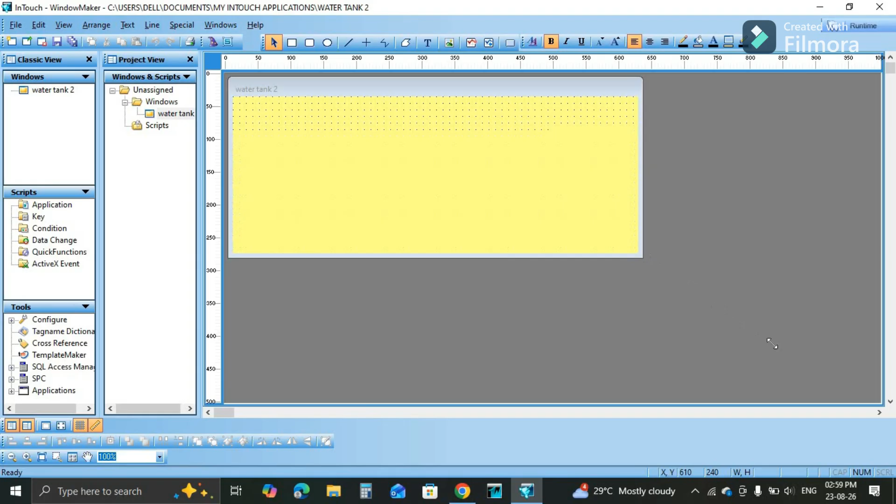First, we will create the HMI screen and arrange all the required objects. Second, we will create and configure the tags. Third, we will configure the water level animation. Fourth, we will add the required scripts and control logic. And finally, we will run the project in runtime mode and test the complete operation. So let's start building our water tank filling HMI project step by step.

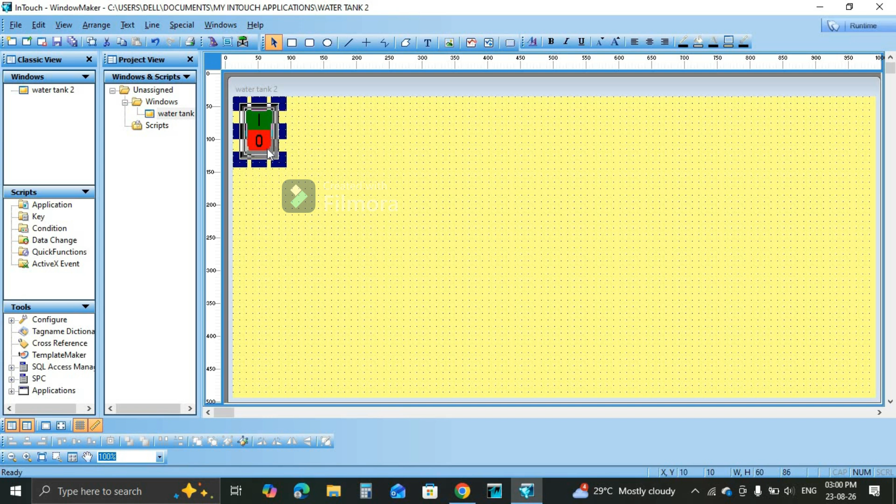First, open AVEVA InTouch window maker. Create a new application and give it a suitable name. After creating the application, open the window maker environment. Now we need to create a new window for our project. Let's create a window and name it Water Tank. This window will be our main HMI screen.

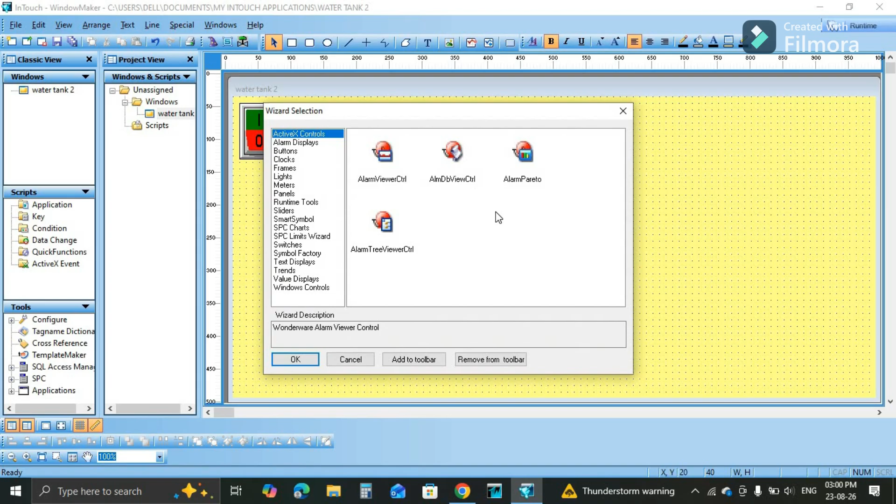Now we can start designing the screen. The first object we need is the water tank. Place the tank in the main working area. We can resize the tank according to our requirement and position it properly on the screen.

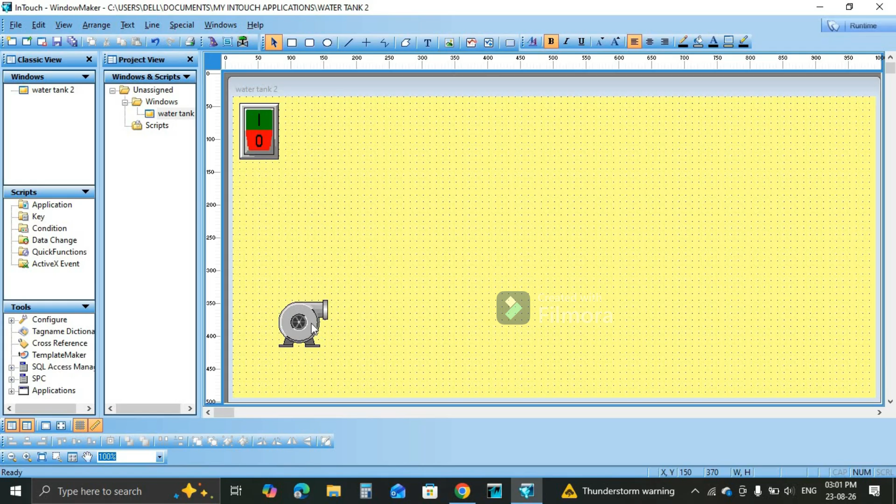Next, we need a pump. Place the pump on the left side of the tank. The pump will represent the device that supplies water to the tank. Now draw a pipe between the pump and the tank.

We also need a valve in the water flow path. Place the valve between the pump and the tank. The valve will be used to control the water flow.

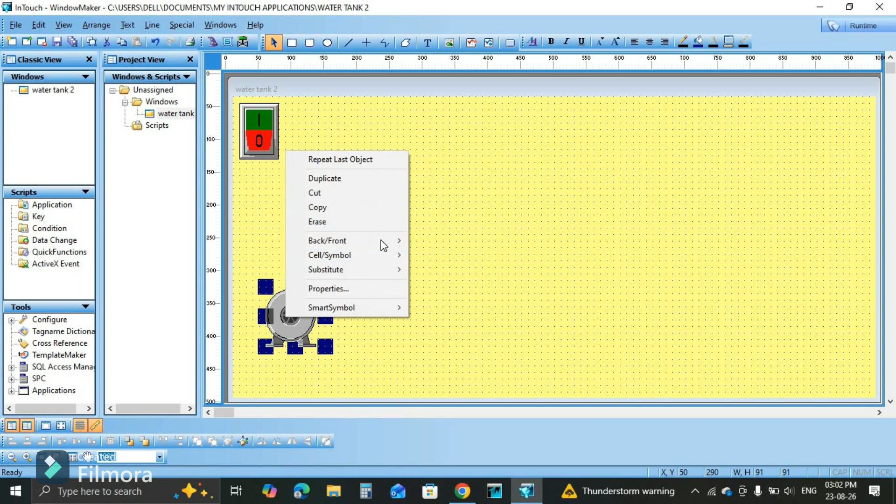Now we need an on and off control switch. Place the switch on the screen where it is easy for the operator to access. We can also add text labels for the pump, valve, tank, and control switch. This makes the HMI easier to understand.

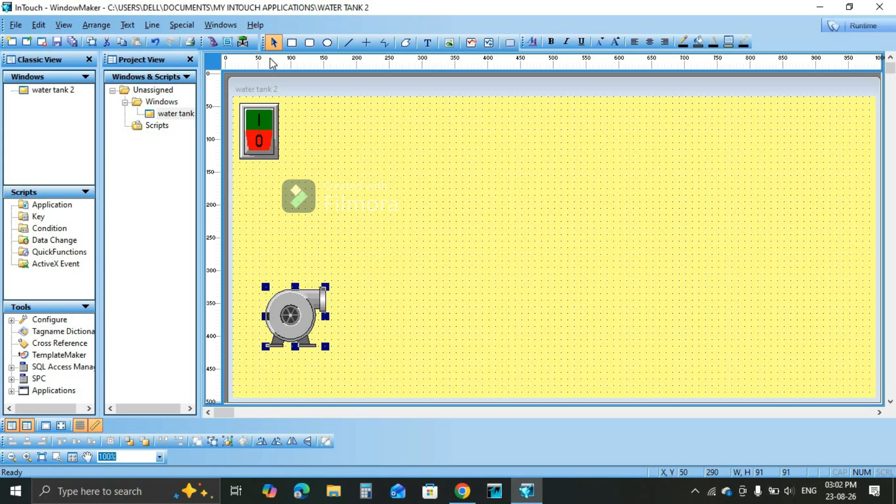Now we need to create the water inside the tank. For this, create a rectangle or suitable shape inside the tank. Place the water object at the bottom of the tank. Make sure the water object fits properly inside the tank. This object will later be animated to show the actual water level. So, at this stage, our basic HMI layout is ready. We have the tank, pump, pipe, valve, control switch, and water object.

Now let's move to the next step and configure the tags.

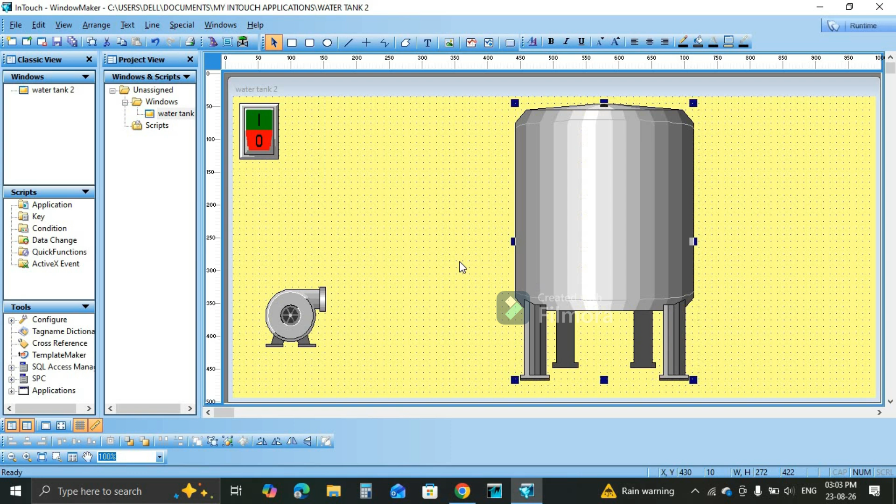Now we need to create the tags that will control our HMI objects. In InTouch, tags are used to store values and control different objects and animations. Open the tag name dictionary.

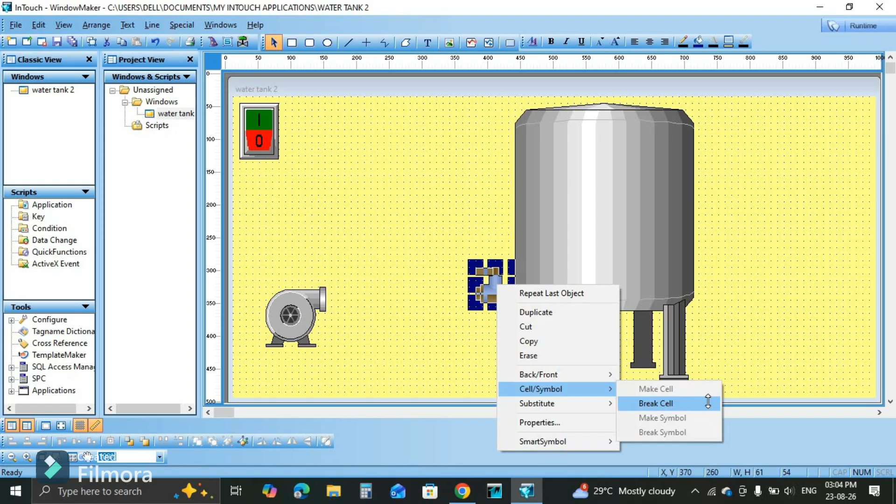Let's start with the main on and off control. Create a new tag named S1. Set its type to memory discrete. This tag will be used for our on and off switch. When the switch is off, S1 will have a value of 0. When the switch is on, S1 will have a value of 1.

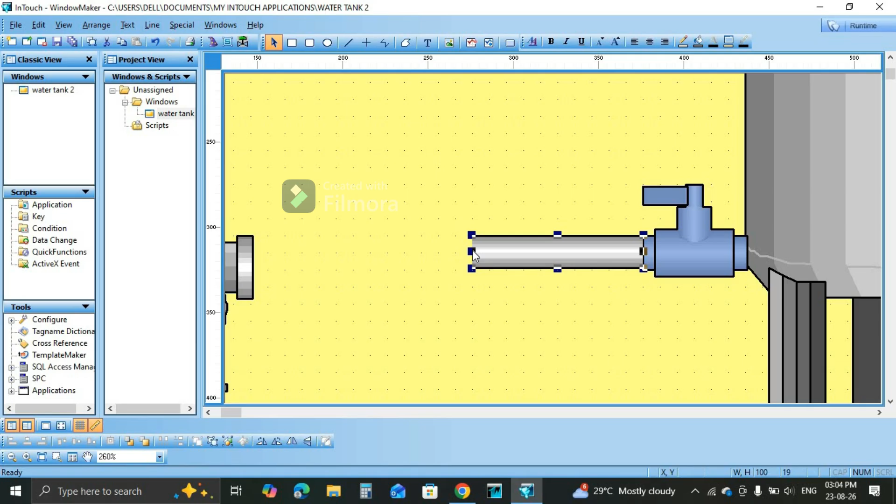Now let's create the tags required for the pump and valve. Create the required pump control tag and set it as a memory discrete tag. This tag will control the pump indication. Next, create a memory discrete tag for the valve. We can use this tag to indicate whether the valve is on or off.

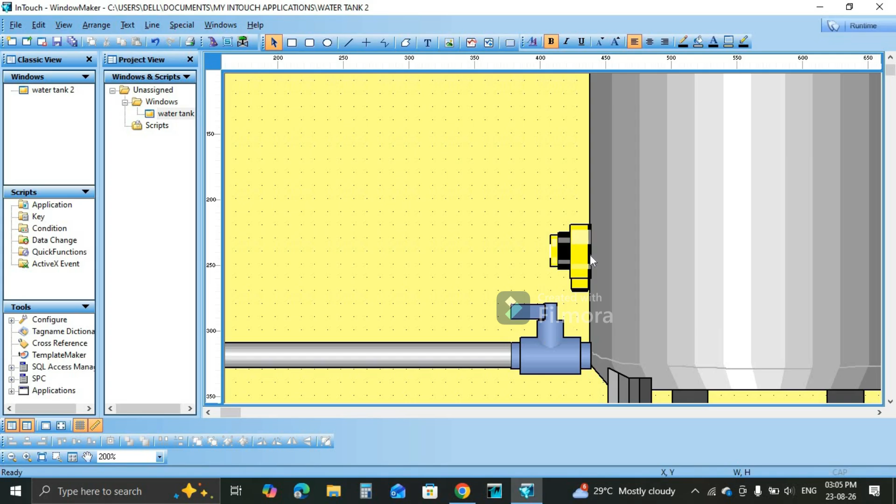Now we need the most important tag for this project. Create a tag named fill. For the water level, use a memory real tag. The fill tag will store the water level value. We will use a range from 0 to 100. So, when fill is 0, the tank will be empty. When fill is 50, the tank will be half full. And when fill reaches 100, the tank will be completely full.

We can also create tags for the low level and high level sensors. These tags can later be used for automatic control.

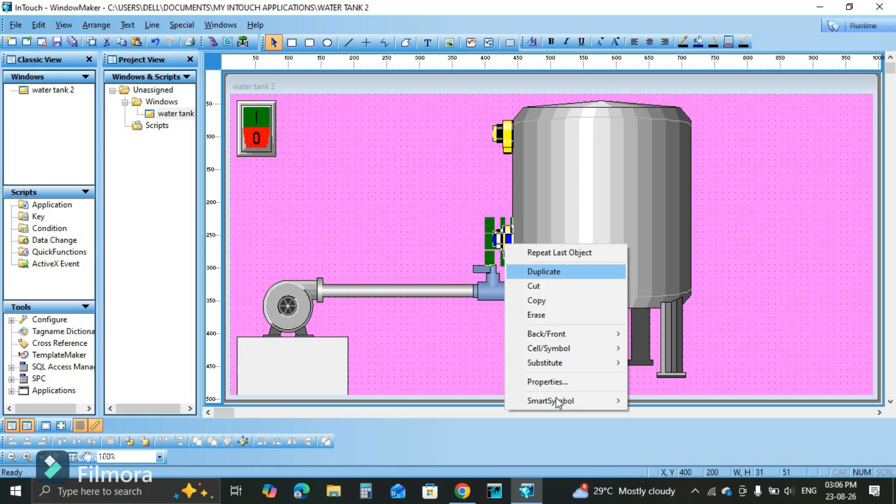Now let's go back to the HMI screen. Select the on and off switch. Open its touch or animation link configuration. Assign the S1 tag to the switch. Now the switch is connected to our control tag.

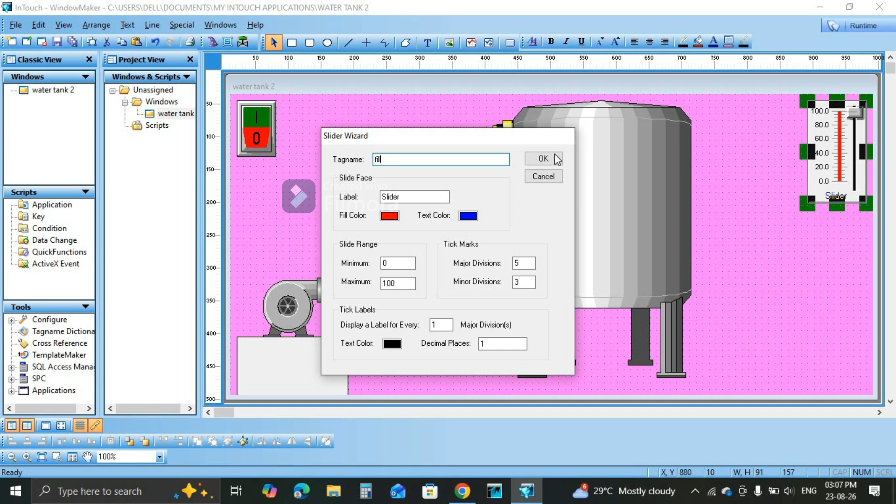Next, select the pump and configure its animation link. Assign the pump control tag. This allows the pump to visually indicate its operating condition. Do the same for the valve. Assign the valve tag to its animation. Now the basic control objects are connected with their respective tags.

The most important remaining task is to connect the water object with the fill tag. Let's do that in the next step.

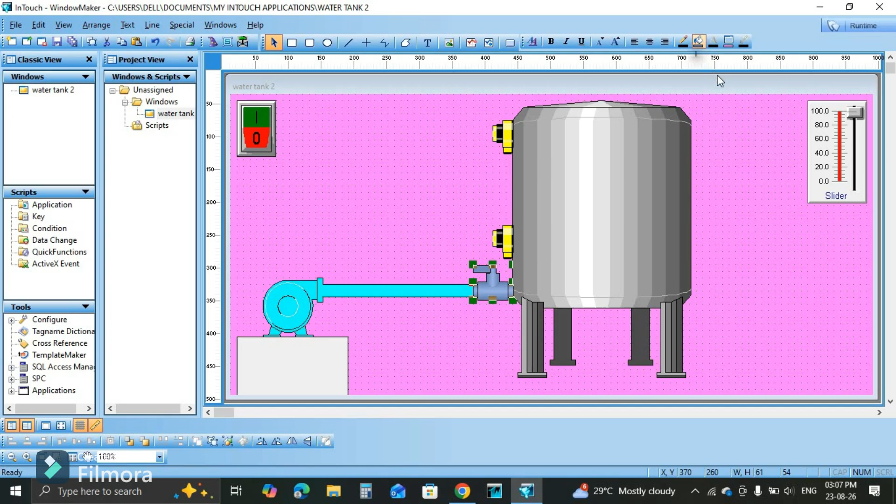Now we will configure the water level animation. This is one of the most important parts of our project. Select the water object that we created inside the tank. Open the animation links. Here we need to configure the appropriate fill animation.

The purpose of this animation is to change the height of the water according to the value of our fill tag. For the expression, select the fill tag. Now set the minimum value to 0. Set the maximum value to 100. Also make sure that the water fills in the correct direction, from bottom to top.

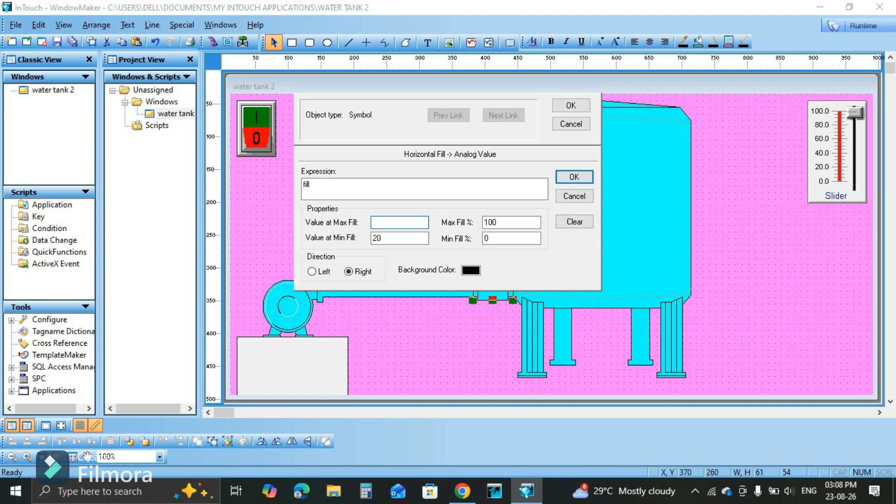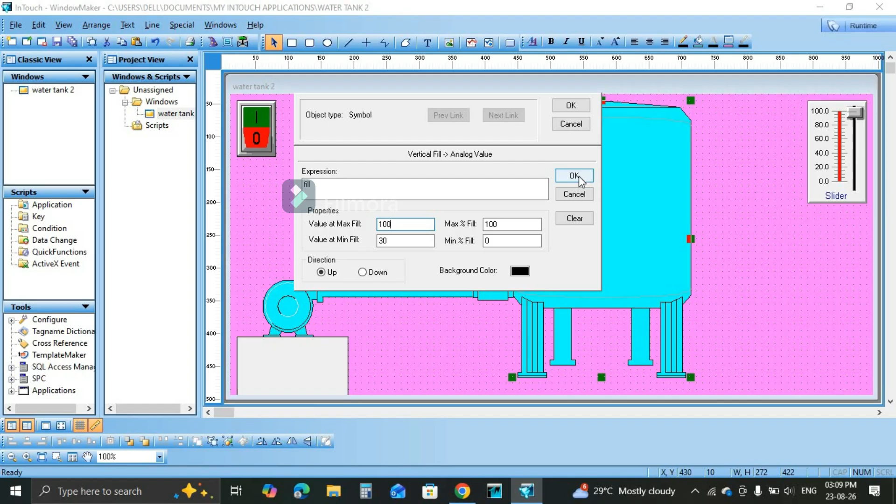Let's understand how this works. When the fill value is 0, the water object will show the empty condition. When the value increases, the height of the water will also increase. For example, at 25%, the tank will show approximately 1/4 water. At 50%, the tank will appear half full. At 75%, the water level will be near the top. And at 100%, the tank will be completely full.

Now let's add a slider for testing the animation. Place the slider on the right side of the HMI screen.

Configure the slider so that it works with the fill tag. Set the slider range from 0 to 100.

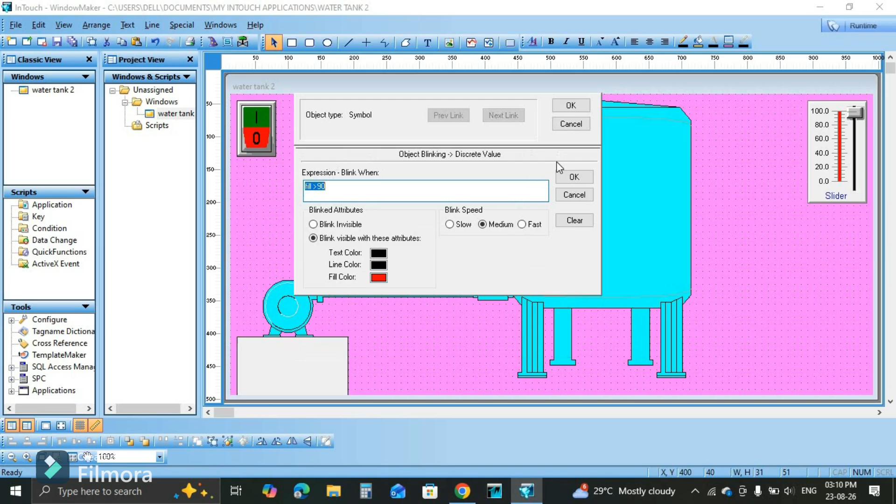Now we can test the water level manually. Move the slider from 0 toward 100. As the value changes, observe the water inside the tank. The water should move upward according to the fill value.

Let's test it again. At 0, the tank is empty. Move it to 25, the water level increases. Move it to 50, now the tank is approximately half full. Move it to 75, the water level rises further.

And finally, move it to 100. Now the tank is completely full. This confirms that our water level animation is working correctly.

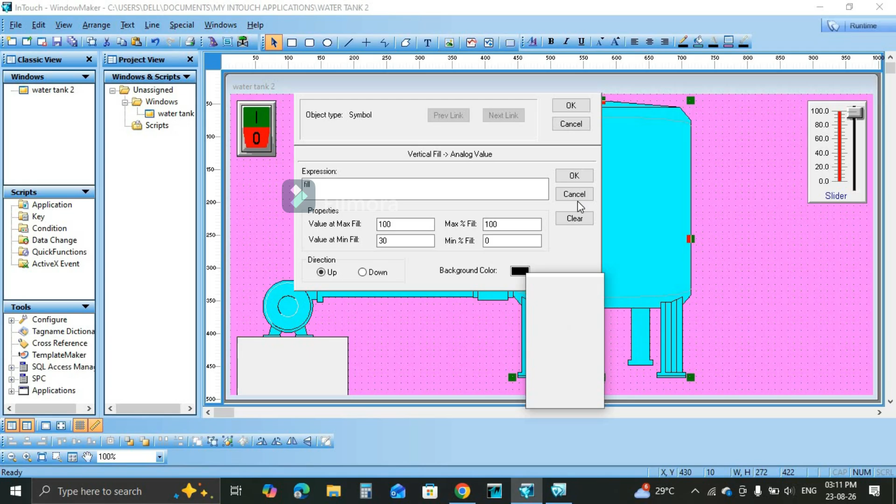The slider is mainly useful during development and testing. Once we add the actual control logic, the fill value can be changed automatically by the script. Now our visual animation is ready. Next, we will add the scripts that will control the complete operation.

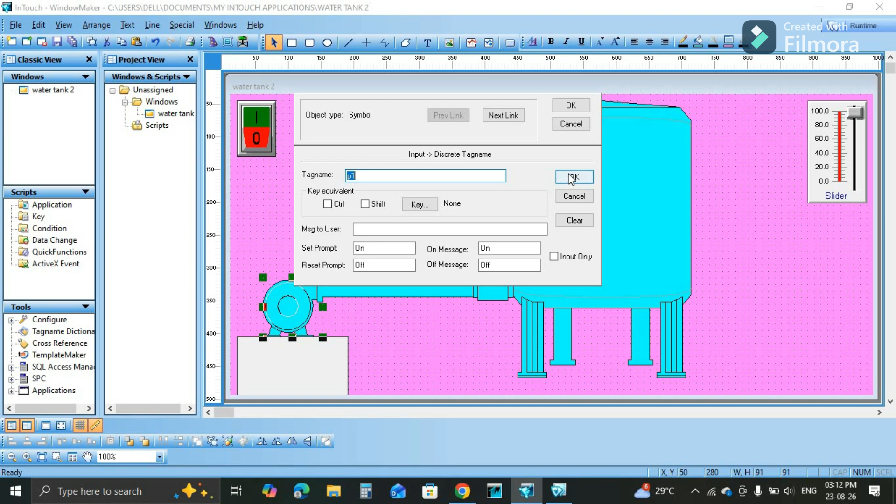Now let's configure the window scripts. Scripts are used to control the behavior of our HMI project. First, we will configure the initial conditions. Open the window script configuration.

Select the on-show condition. The on-show script runs when the window is open. Here, we can initialize our tags.

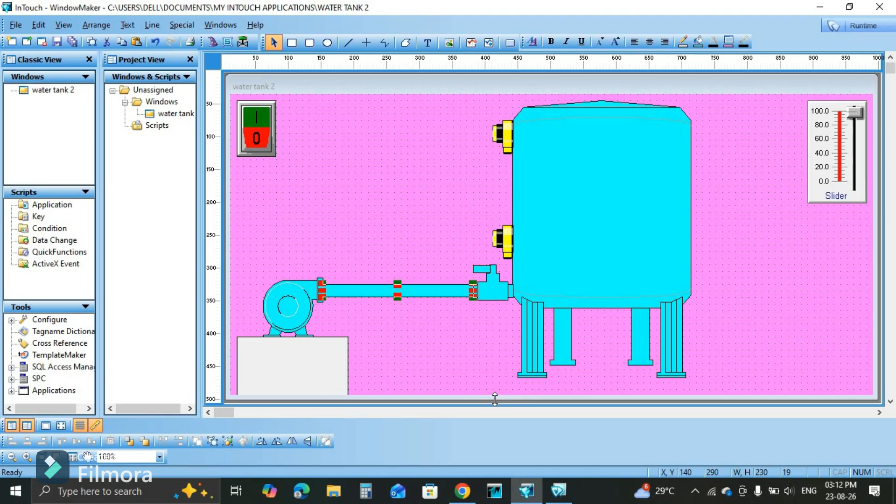For example, we can set the main switch to off. We can set the pump and valve to off. And we can set the initial water level to 0. This ensures that every time we open the HMI window, the project starts from a known condition.

Now let's move to the main control logic. Select the while showing condition. This script continuously checks the conditions while the window is active.

Here, we can check the status of the main on and off switch. When the operator turns the switch on, the filling operation should start. The pump can be turned on. The valve can also be opened. At the same time, the water level value can start increasing.

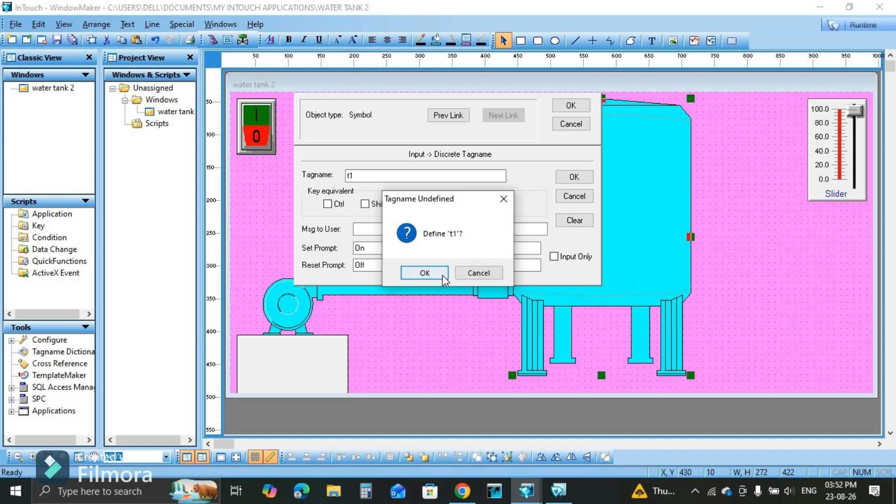So the basic sequence is: first, the operator turns on the switch. Then the pump starts, the valve opens. The fill value begins to increase. And the water level inside the tank gradually rises.

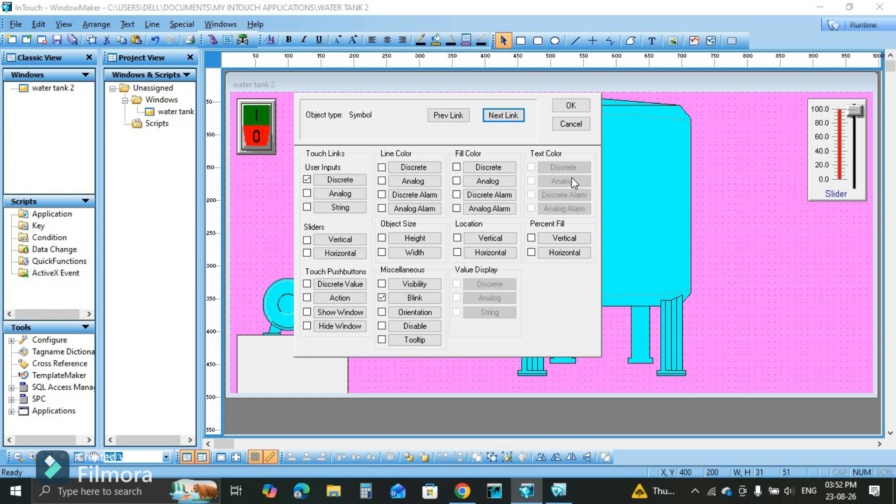Let's understand the water level logic. If the fill value is 0, the tank is empty. As the filling process continues, the fill value increases. For example, it can move from 10 to 20, then 30, 40, 50, and so on. The animation automatically converts this value into a visual water level.

Now we also need a maximum limit. The water level should never increase above 100. Therefore, when the fill value reaches 100, we keep it at 100. At this point, we can stop the pump and close the valve. This represents the high-level condition. We can also use a high-level sensor for this purpose.

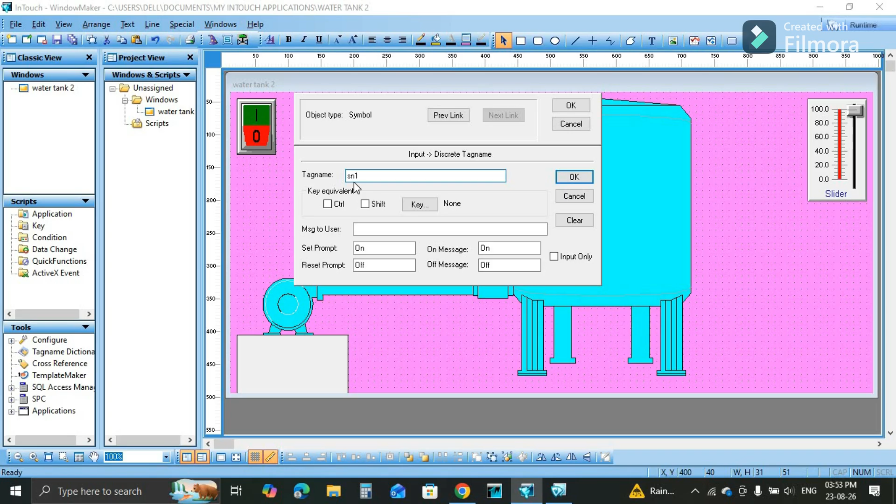Similarly, a low-level sensor can be used to detect when the tank reaches a low water level. These sensor signals can later be connected to automatic control logic. This makes the project more realistic and closer to an industrial HMI application.

Now let's look at the complete sequence. When the switch is off, the filling operation remains stopped. When the switch is turned on, the pump starts and the valve opens. The water level begins increasing. The tank gradually fills. When the water reaches 100%, the filling process stops. This is the basic working principle of our water tank filling project.

Now our HMI design, tags, animation, and basic control logic are ready. Let's move to the final step and test everything in runtime.

Now it's time to test our complete project. Save the application first, then run the project in runtime mode. When the HMI starts, check the initial condition.

The tank should be empty. The pump should be off. The valve should be in the off or closed condition. And the main switch should also be off.

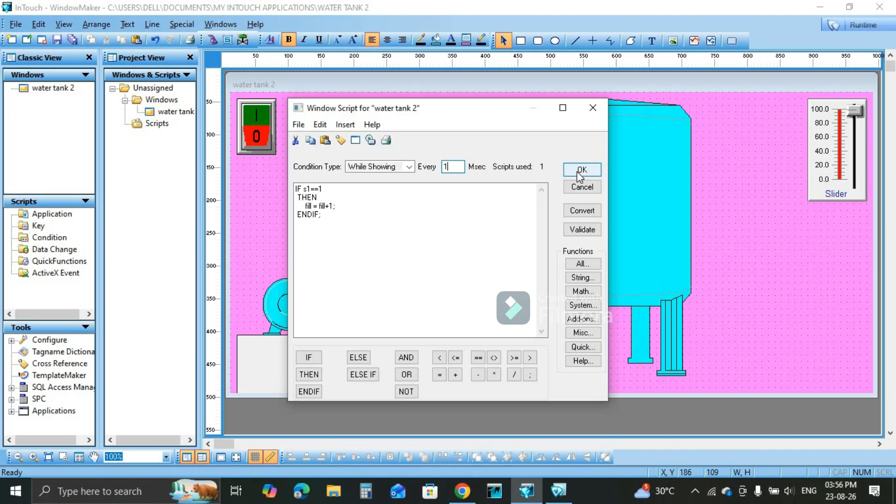We can also use the slider during testing to manually change the fill value. Move the slider down and observe the water level. The water should decrease accordingly.

Move the slider back toward 100. The water should rise again. This is a very useful way to verify the animation before connecting the HMI to a real PLC.

At this point, our basic water tank filling HMI project is complete. We have created the HMI screen. We created and configured the required tags. We connected the pump, valve, and control switch. We created the water level animation from 0 to 100%.

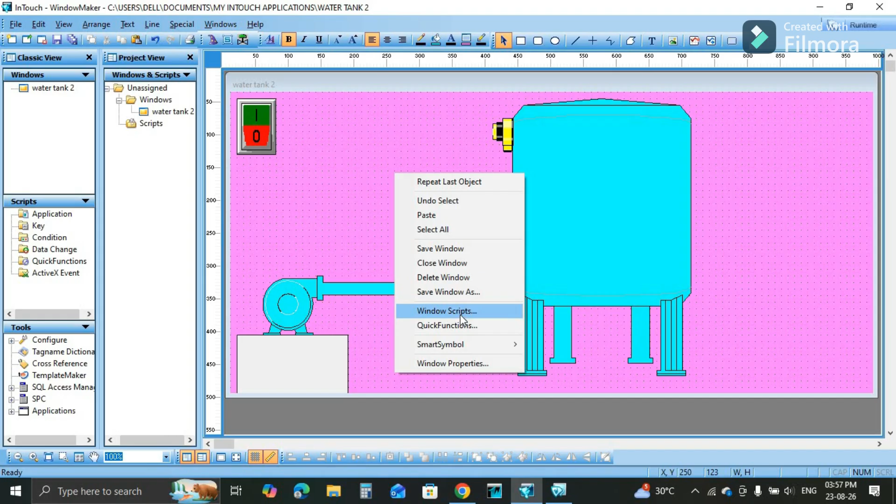We configured the window scripts. And finally, we tested the complete project in runtime mode. This project is a simple but very useful starting point for learning AVEVA InTouch HMI and SCADA.

You can further improve this project by adding automatic control, alarm indications, level sensors, pump status, start and stop buttons, and PLC communication.